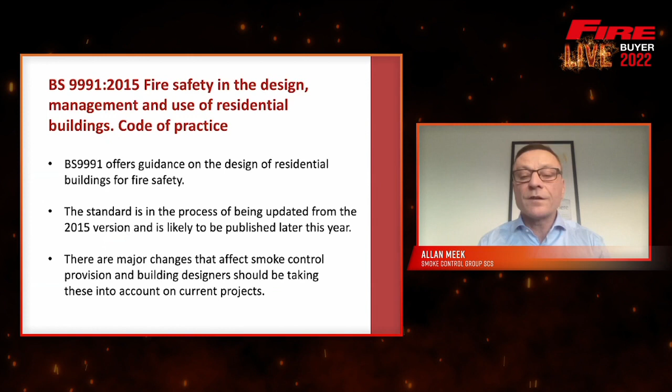Most of the changes are intended to improve the means of escape from high-rise residential buildings and to facilitate evacuation where necessary. We'll be looking at the major implications for smoke control and associated areas and offering our advice on how to plan for the new standard.

So the general changes are, the first one is where a backup power supply is required for essential equipment such as firefighting lifts and smoke control systems. The proposed standard details the methods of achieving this as either a generator, an uninterruptible power supply, a UPS, or an independent high voltage supply, provided it's fed from an independent substation to that feeding the primary supply. Using a single intake with diverse routes and a life safety distribution board is no longer acceptable.

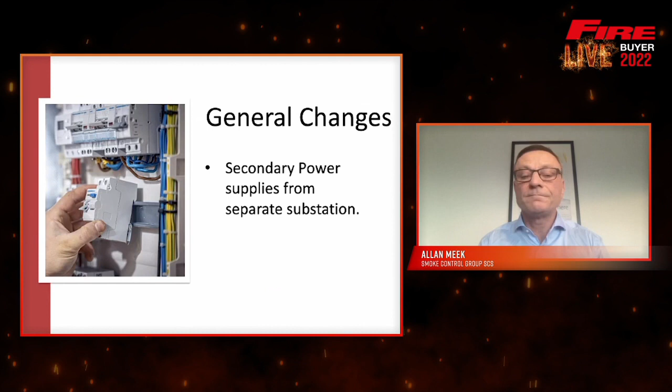In all developments where passenger lifts are installed, at least one lift should now be an evacuation lift. Access to the evacuation lift or group of lifts should be provided via a protected evacuation lift lobby. This should not connect directly with flats or storage areas or other areas of risk, for example, refuse areas.

In buildings over 18 meters with multiple staircases, more than one evacuation lift is needed. Where more than one escape staircase serves a single story, the number and positioning of evacuation lifts provided should be such that if a fire affects access to any one lift, alternative lifts will remain available for use.

Smoke control systems will be required to protect the lobby as well as the staircase. For extended corridor systems, an additional smoke control system may be required for the corridor, and we'll look at that in more detail later on.

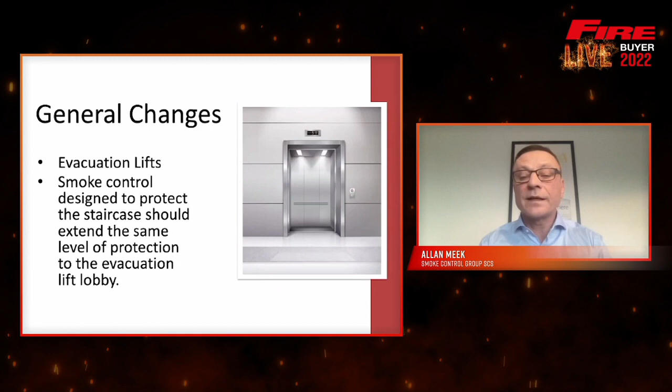The current version of the Smoke Control Association Guide to Smoke Control in Apartment Buildings states that for buildings where the escape travel distance is within the Approved Document B recommendations, then the only performance criteria for a mechanical extract system is to be at least as effective as an equivalent natural ventilation system.

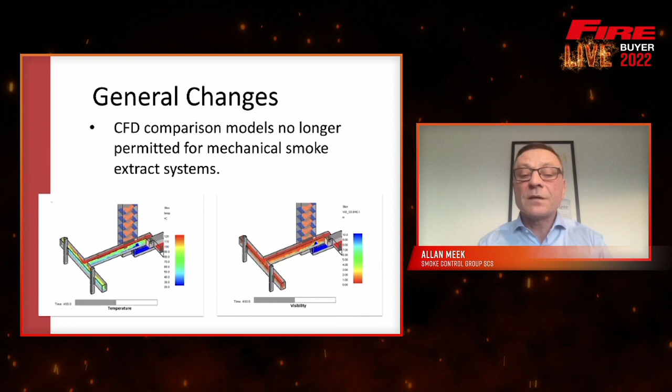There have been cases where CFD modeling has been used to justify the use of a mechanical system that permits smoke to enter the staircase on the basis that the code compliant system does this as well. Clearly, this is unacceptable and was not the intention of the SCA guide. In the new 9991, this is no longer permissible, and CFD modeling must demonstrate that the staircase is kept free of smoke.

So the biggest change is for single stair buildings above 18 meters, where pressurization is now deemed the only approved method of smoke control for the staircase and lift lobby. Pressurization systems work by raising the pressure within the escape route relative to the fire zone to prevent smoke entering in order to allow people to escape from the building.

They also provide a minimum velocity of 2 meters per second through the door between the stair and the lobby when it's held open for firefighting. They're widely regarded as offering the highest level of protection for occupants and firefighters.

The most common current approach to such buildings is mechanical extract from the common lobby, which also acts as a firefighting lobby. This is no longer an acceptable alternative to pressurization. It should be noted there'll be a greatly increased level of plant to be accommodated in the building based on the current draft standard.

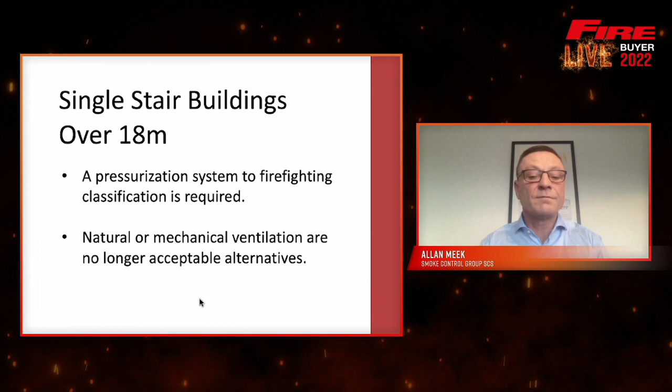The current standards for pressurization are also in the process of being changed, with the design of systems being covered in the new BS EN 12101 Part 13, and the equipment being covered in BS EN 12101 Part 6, which currently caters for both design and product. The draft standards have been approved and are likely to be published later this year.

The new standard simplifies things a bit with less categories, and the specified pressure difference has reduced from 50 pascals to 30 pascals. The firefighting provision, however, is similar in that the open door velocity for firefighting protection remains at 2 meters per second. Achieving the open door velocity is the most onerous criteria and the one that dictates the fan and duct sizes. So there should be no significant change to the plant sizes as a result of the new standard.

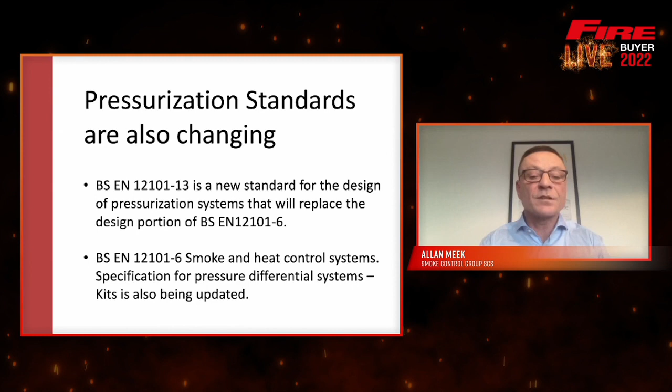This illustration, taken from EN 12101 Part 13, shows a typical arrangement for a pressurized staircase with a firefighting lift and lobby. The shaded areas will be pressurized to prevent smoke from entering. There'll be separate fan sets required for the staircase and lobby, with a firefighting lift shaft also being pressurized by the lobby fan set.

The fans and air intakes should ideally be located at ground floor level to prevent them becoming contaminated with smoke and recirculating it around the building. Or if this is not possible, they may be mounted on the roof. In this case, they must have two separate inlets with in-duct smoke detection and shut-off dampers arranged such that they cannot both become contaminated by smoke.

An air release path is then required in the corridor to allow for the air to flow from the lobby into the corridor and providing the 2 meters per second velocity. This can be achieved by ventilators in the facade of the building if they can be positioned in opposite faces of the building to allow for adverse wind pressure.

More commonly, it's done through a rising shaft as illustrated here. This can be a natural vent shaft or a mechanical system, which would require an additional set of high temperature extract fans on the roof.

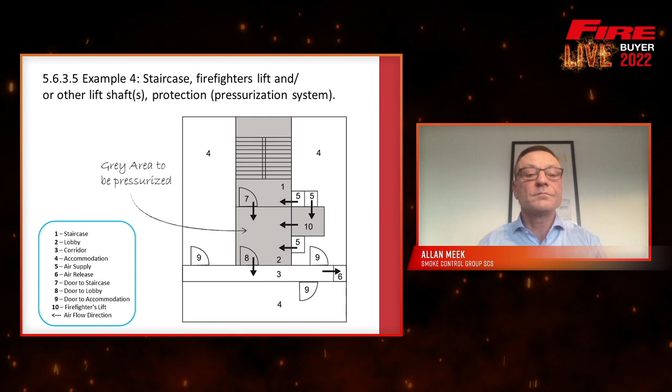Escape travel distances are often extended beyond the recommendations of Approved Document B using BS 9991 guidance, and travel distances of up to 30 meters are not unusual. The current draft states that where corridors have single direction travel distances exceeding 15 meters, then an additional mechanical ventilation system is required to maintain tenable conditions within the corridor.

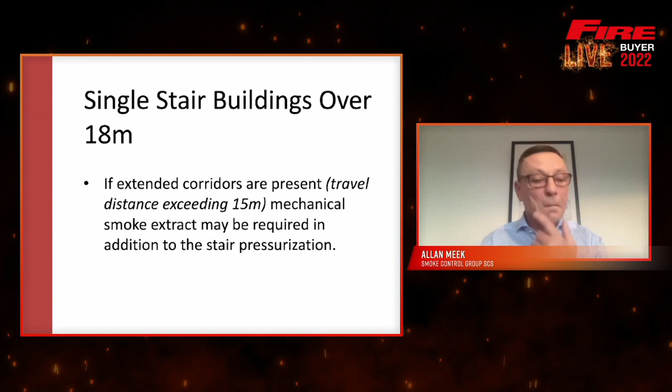Here's an illustration of a building with an extended travel distance. Once again, we have a pressurized staircase and lobby and a firefighting lift shaft. In this case, the extended corridor also requires protection.

One possible solution would be to make the air release shaft a mechanical dual-purpose air release and smoke extract system with high-temperature fans. At the opposite end of the corridor is a natural ventilation shaft to provide replacement air to the extract system when the lobby door is closed during the means of escape period.

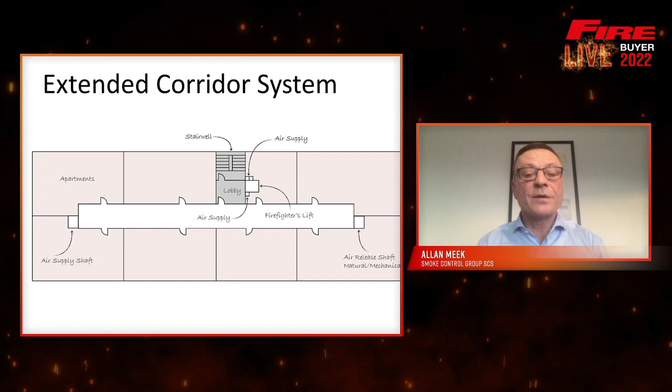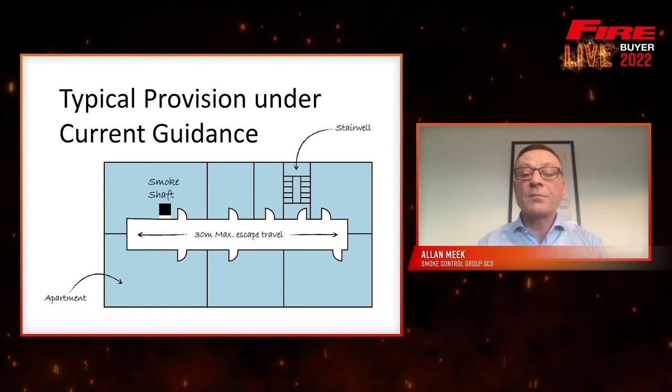To give some context to the plant requirements, here's a typical extract fan arrangement that would be mounted on the roof. The overall dimensions would typically be in the region of 3 meters long by 1 meter wide by 1.5 meters high, with something like a 30 amp power supply requirement. A pressurization fan set would be of similar proportions, and the inlet ducts would need to be extended in different directions to prevent smoke contamination.

The typical riser duct sizes within the building would be 0.6 meters squared for the stair pressurization, around 0.6 meters squared for the lobby pressurization duct, and the same for the mechanical air release. The natural air supply shaft would need to be at least 1 meter squared. So we can see there's a considerable amount of space taken up within the building for these provisions.

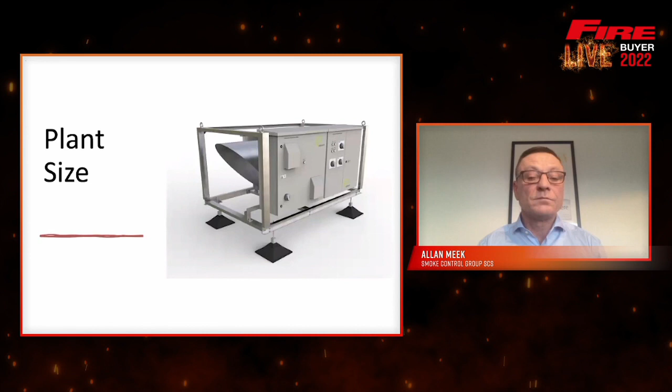For pressurization and mechanical extract systems requiring different fan speeds for means of escape and firefighting conditions, it's been common practice to install fireman switches that require manual intervention to switch the system to high speed when firefighting commences. There's been much debate about the appropriateness of this method and an increase in reluctance by firefighters to agree to the use of such devices. Considering the lack of standardization, labeling, and location of such switches, and the complexity of common smoke control systems these days, this is not surprising.

The current draft proposal advises that systems, with the exception of openable vents, should be fully automatic in their operation and should not rely on the interaction of firefighters to achieve their performance objectives during the means of escape or firefighting phases. Smoke control systems should start in firefighting mode at the outset if this is a requirement.

Alternatively, variable speed mechanical systems should be controlled using pressure sensors or other means and should not require firefighters to operate controls in order to initiate a high-speed mode. This would entail monitoring the pressure in the lobby and increasing the fan speed when the lobby door is open, which should correspond with the firefighting phase.

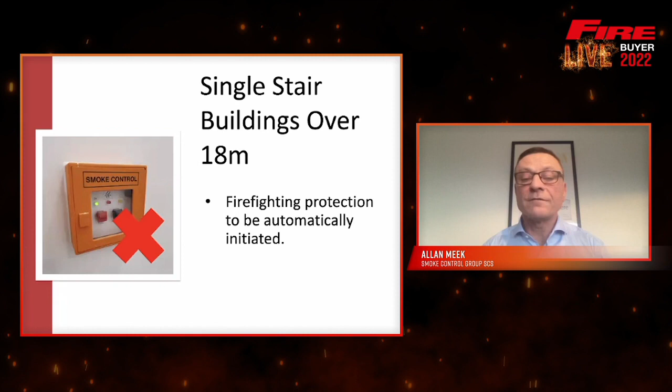Natural smoke shafts have widely been used on single-stair high-rise buildings, both for means of escape and firefighting for many years. Their use is now limited to buildings up to 30 meters with multiple staircases and compliant travel distances.

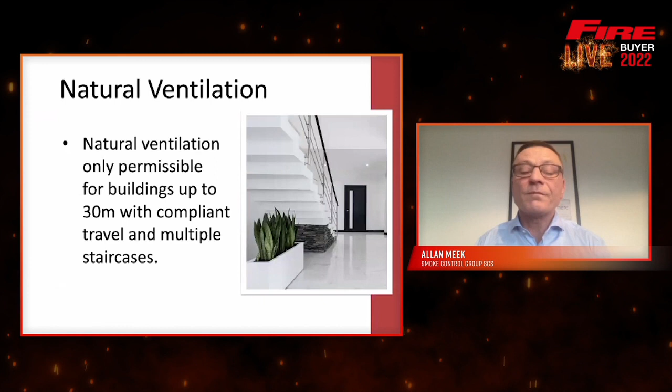So finally, I'd like to look at the changes to multiple stair buildings over 18 meters. Here we still have the option of using natural smoke shafts up to 30 meters or mechanical extract systems for taller buildings. The change will be the addition of lobbies for evacuation lifts or firefighting lifts, and smoke control will be required to protect the staircase and the lobbies.

Escape travel is as prescribed in ADB with a maximum dead end of 7.5 meters and 30 meters between connecting doors in the corridors.

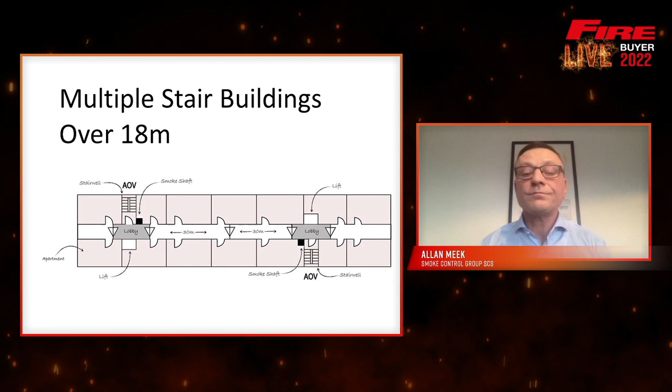So the changes contained in this draft make the design and implementation of smoke control systems for most high-rise residential buildings significantly more complex. The detailed design will almost certainly be carried out by a specialist, and selecting a competent one will be even more important in the future.

One measure of competence is third-party certification, and we would strongly recommend using a member of the IFC SDI 19 scheme, which is currently the only one for smoke control specialists. It's also important to check the scope of certification, as many scheme members will not be certified for design.

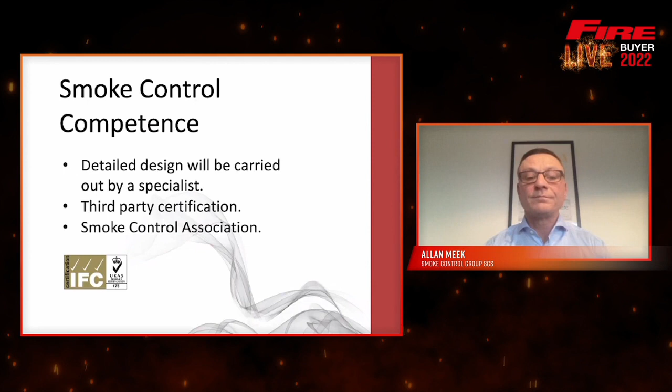A further positive indication of competence is membership of the Smoke Control Association, which in addition to third-party certification, requires minimum levels of PI insurance and adherence to the Code of Conduct, which mandates the use of independently tested products. On the SCA website, you can see members with a table here which details their scope of work. So I would suggest this is a good place to start when looking for a competent contractor.

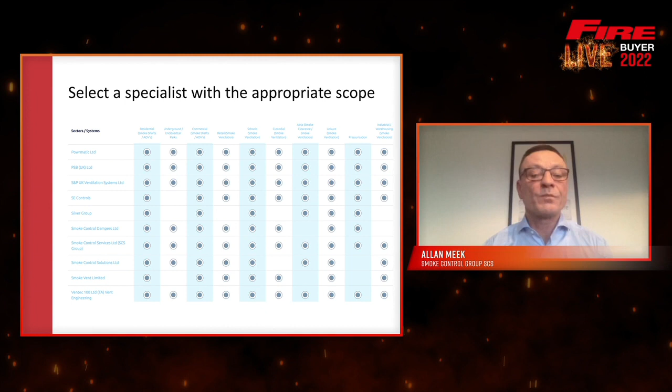So in summary, we would say the addition of evacuation lift lobbies is the most significant change affecting smoke control provision. And this, combined with the requirement for pressurization systems for single stair buildings over 18 meters, is likely to make them considerably less attractive to developers. It remains to be seen what the final published guidance will look like, but in the meantime, our advice would be to consider pressurization over mechanical extract for single stair buildings at design stage and to engage with a competent specialist early in the design.